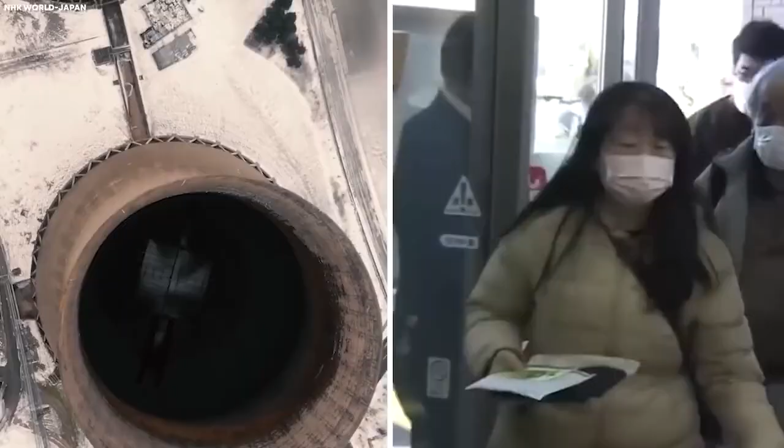Rolling blackouts became common in some regions. Electricity bills rose sharply, putting strain on families and businesses already recovering from the earthquake and tsunami. Fear of future shortages spread across the country. People worried whether Japan could ever achieve energy stability again.

The images from that time were heartbreaking. Families who had lived for generations on ancestral lands had to abandon them overnight. Farmers were forced to slaughter animals they could no longer feed or sell because of radioactive contamination. Children went to school wearing radiation monitors, and parents feared that their kids would never grow up in a safe environment. The Fukushima disaster left a scar that was not only physical, but also emotional and cultural. Confidence in the government's ability to keep people safe was badly damaged.

In the years after Fukushima, Japanese engineers and policymakers faced a problem that seemed almost impossible to solve. Nuclear energy had collapsed as a trusted option. Fossil fuel imports were draining the economy, and renewable energy sources like solar and wind were struggling to provide consistent power at the scale Japan needed. Out of this desperation came an idea so bold that it made the world laugh at Japan. Japan would turn to the one resource it had in abundance, the powerful ocean currents running along its coast.

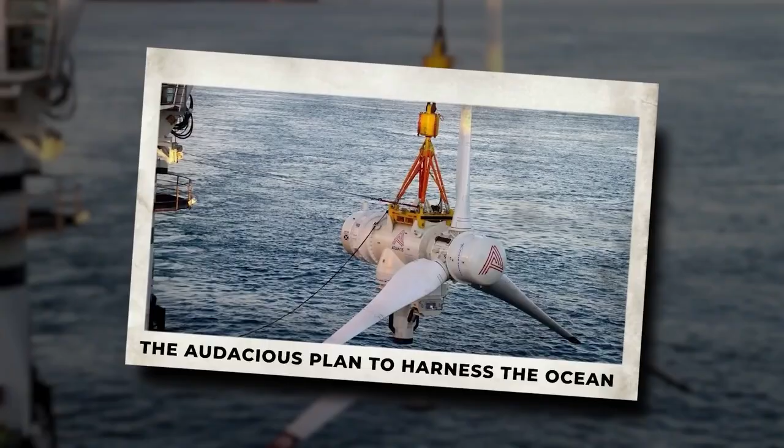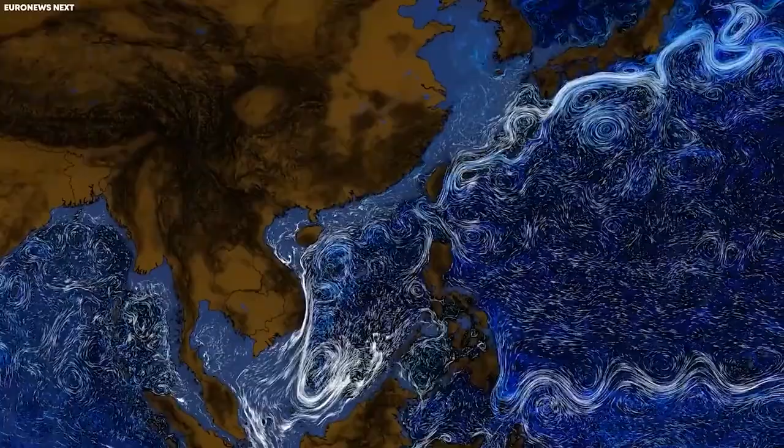The audacious plan to harness the ocean. The Kuroshio Current became the center of this vision. Known as one of the strongest ocean currents in the world, it flows northward past Japan's Pacific coast like a massive underwater river. Unlike wind or sunlight, which fluctuate depending on weather, ocean currents move day and night, season after season, with remarkable consistency. This stability is a dream for energy planners because it means the electricity supply would be steady and predictable rather than intermittent. If Japan could capture even a fraction of the Kuroshio Current, it could secure a new and reliable energy source for decades.

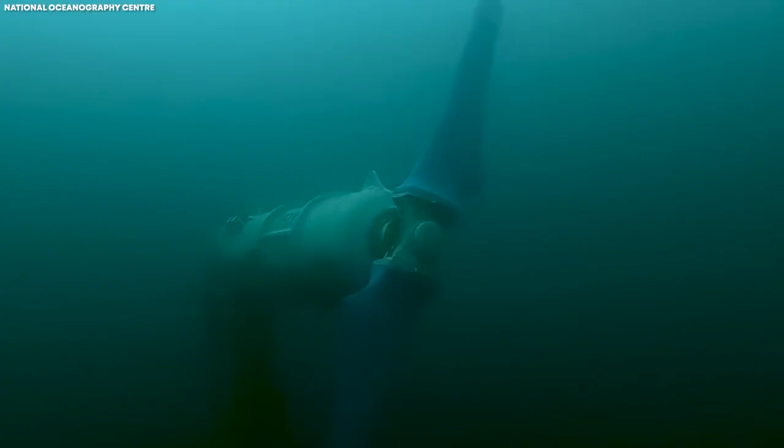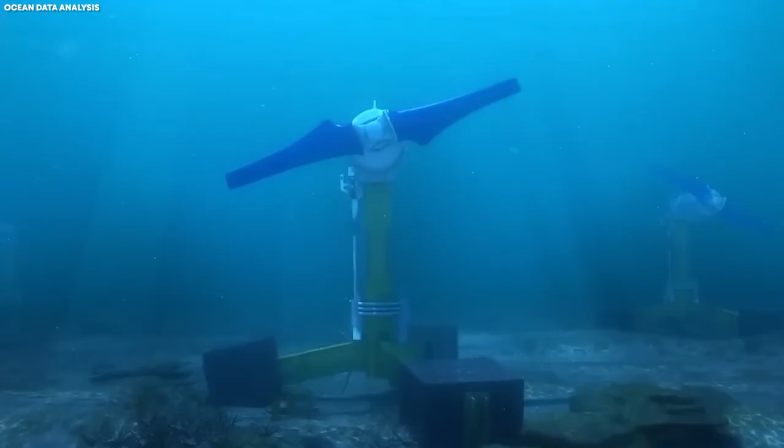The idea was straightforward on paper, but radical in practice. Japan would sink massive turbines into this current and let the force of moving water turn giant blades to generate electricity. Instead of filling land with solar panels or covering hillsides with wind towers, the country would build its power stations under the sea. These turbines would not be seen from the shore and would not take up precious space on land, making the plan politically appealing in a crowded island nation.

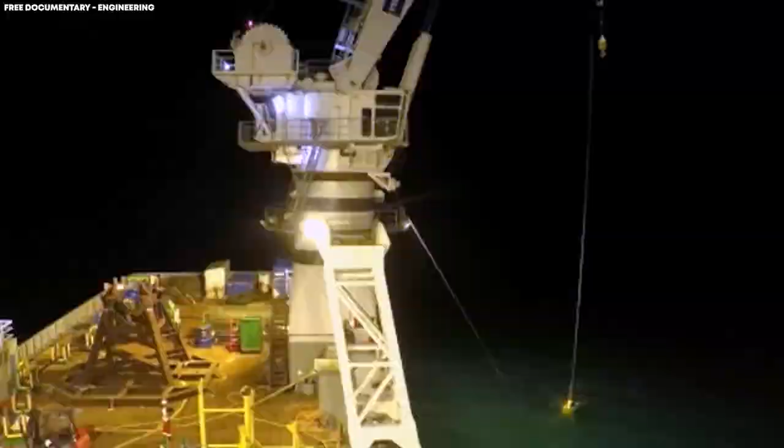Early studies suggested that the Kuroshio current contained staggering potential. Analysts estimated that if even part of the current could be harnessed, it could provide up to 200 gigawatts of electricity. That number was more than Japan's entire national demand, meaning the current alone could theoretically power the whole country and still have energy to spare.

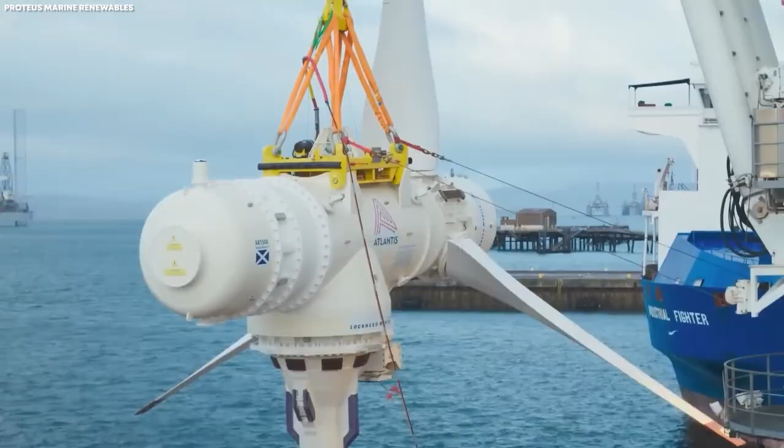For politicians, this vision became more than a technical plan. It was a symbol of recovery after national tragedy. Newspapers framed the concept as a chance for Japan to lead the world in a new kind of renewable power. The ambition was breathtaking, but it also sounded unbelievable to many.

Before the first turbines were ever lowered into the sea, critics were already lining up. Mockery, blackouts, and the 2018 Hokkaido tragedy.

From the start, Japan's plan to sink giant turbines into the ocean was treated as a national joke. Commentators laughed that the country had lost its mind and was wasting money on fantasy projects at sea. Business columnists sneered that Japan was chasing a dream fit for cartoons, while the rest of the world built practical solutions like wind farms and solar grids.

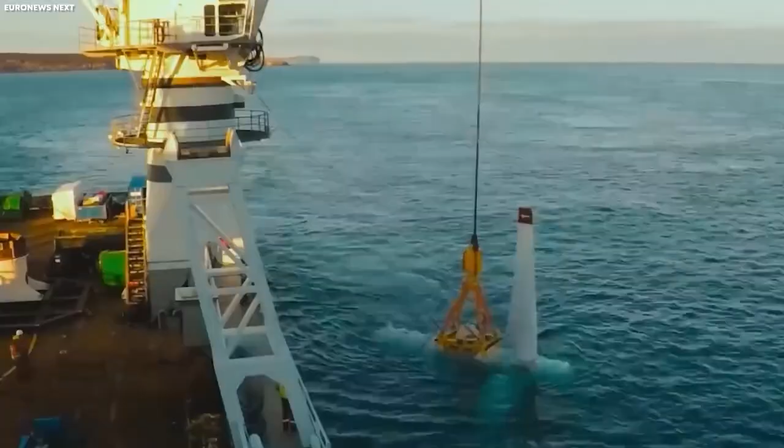International critics were even harsher, declaring, "Japan wants to power itself with invisible machines in the deep ocean, but it cannot even keep the lights on during a storm."

Critics immediately turned to the 2018 blackout. In September that year, before dawn, a powerful earthquake struck Hokkaido. Measuring 6.7 in magnitude, it shook the island hard enough to topple homes, while landslides buried entire communities. But the true disaster came when the Tomato Atsuma thermal power plant, which supplied almost half of Hokkaido's electricity, was knocked offline.

In an instant, the entire grid collapsed. All of Hokkaido went dark. More than 5 million residents lost power. Trains stopped on their tracks. Traffic lights went out, throwing intersections into chaos and creating massive gridlocks. Families were left in freezing apartments with no light, no heat, and no way to keep food from spoiling.

Hospitals switched to emergency generators, but some ran dangerously low on fuel. Doctors were forced to work by flashlight, fighting to keep patients alive as machines began shutting down around them.

The blackout took lives too. One of the most heartbreaking cases was a young girl in a hospital who relied on a ventilator to breathe. When the power went out, her life support system failed. The backup generator could not keep her machine running long enough. She died in the dark, and her parents could only watch helplessly as doctors tried to keep her alive with equipment that no longer worked.

On the roads, another tragedy struck. A middle-aged truck driver was caught in one of the massive traffic jams created when traffic lights failed across the island. Cars stretched for miles, locked in lines with no escape. The driver was forced to sit for hours in the sweltering cab, with no way to move and no immediate access to medical help. He suffered a fatal heart attack while trapped in the jam, and by the time rescuers finally reached him, it was too late.

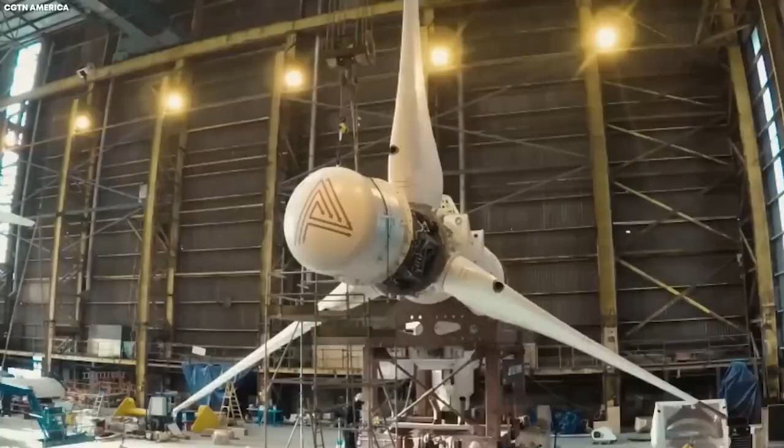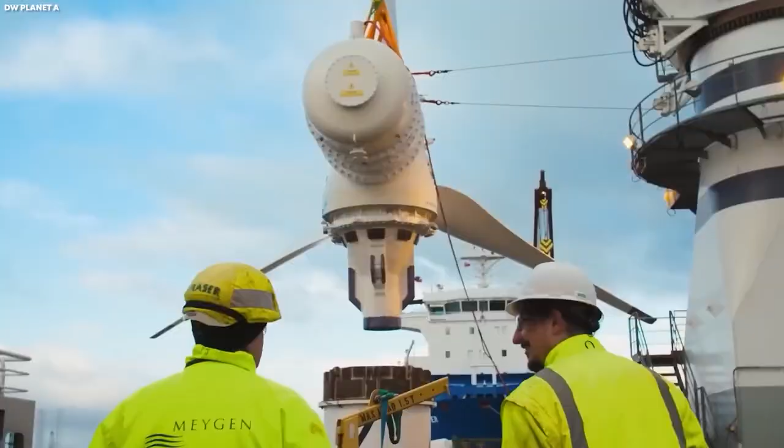The tidal turbine project became an easy target in the aftermath. Politicians and commentators pointed straight to Hokkaido. They said Japan had no business pouring billions into sinking machines in the ocean when people were dying on highways and in hospitals because the national grid was so fragile. Online forums were even crueler, with commenters saying the only thing Japan's ocean project was powering was the laughter of the world. Yet even with the sting of that humiliation, Japan's engineers refused to back down.

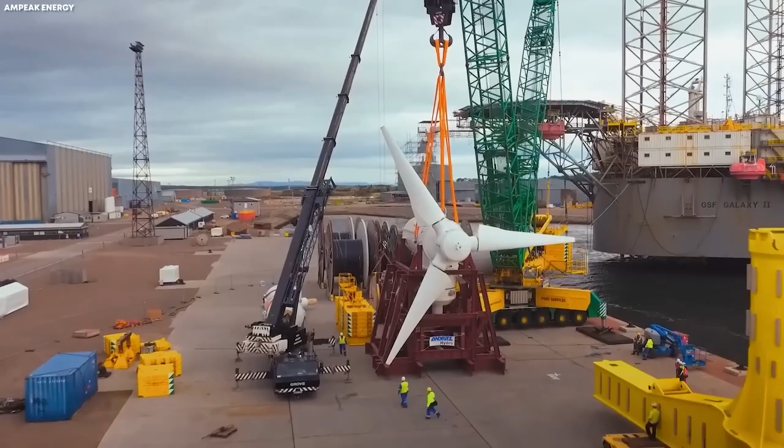Away from the headlines, they began preparing their first real step into the ocean.

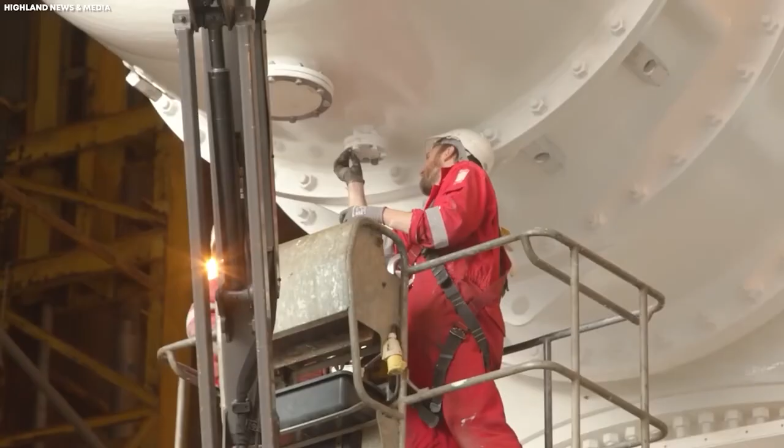First steps: sinking the pilot turbine. In 2021, Japan finally moved from theory to practice. The country launched its first real experiment with ocean current power by installing a prototype turbine known as the AR-500. This was a pilot device, built to test the technology on a limited scale before attempting larger deployments.

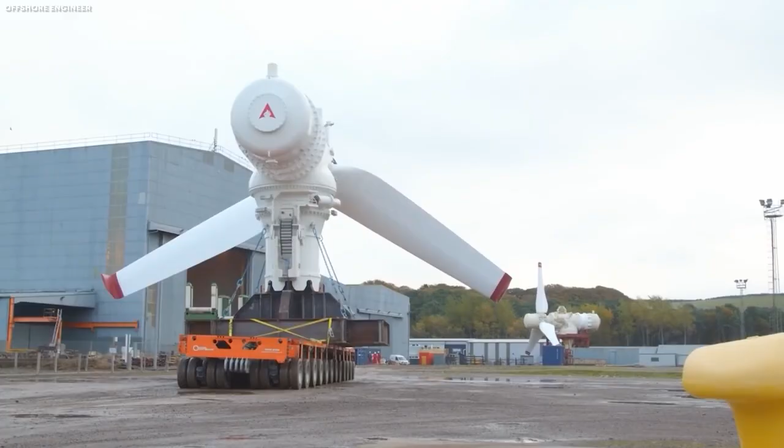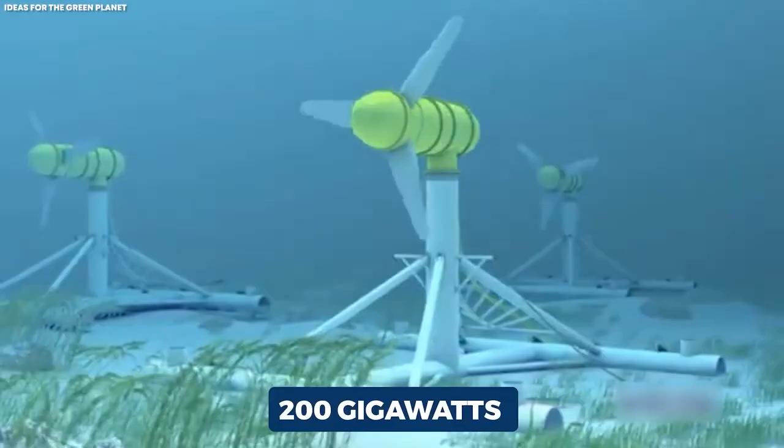The AR-500 could generate 500 kilowatts of electricity, enough to supply a few hundred homes, but far below what Japan needed nationwide. It was never meant to solve the crisis on its own. Instead, it was a learning tool placed in the Naru Strait to prepare engineers for the much bigger goal: tapping into the Kuroshio current, which held the potential to generate as much as 200 gigawatts of power. While modest in size, the AR-500 represented a critical first step toward that ambition.

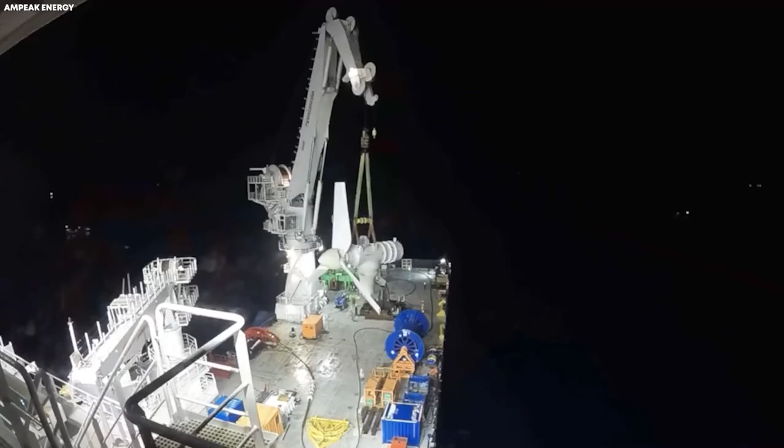The team began by placing the turbine in the Naru Strait, a narrow body of water in Japan where ocean currents are strong and steady. Choosing this location was strategic. The strait offered powerful enough water flow to turn the blades consistently, but was also close to shore, which made it easier to connect the device to monitoring equipment and carry out repairs.

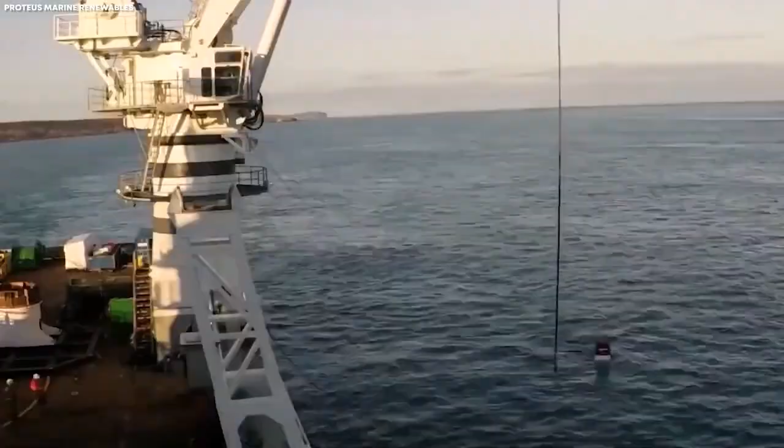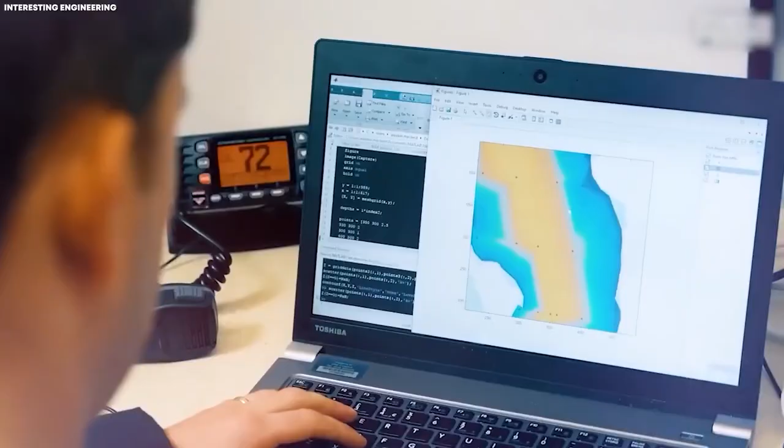The AR-500 worked on the same principle as a wind turbine, but instead of blades turning in the air, the blades were turned by the force of moving seawater. Ocean water is about 800 times denser than air, so even a relatively slow current carries a tremendous amount of energy. This density allows water-driven turbines to generate more power with smaller blades compared to wind turbines. However, it also means the stress on the equipment is far greater, which is why the pilot was essential to test durability. One of the biggest engineering challenges was anchoring the device.

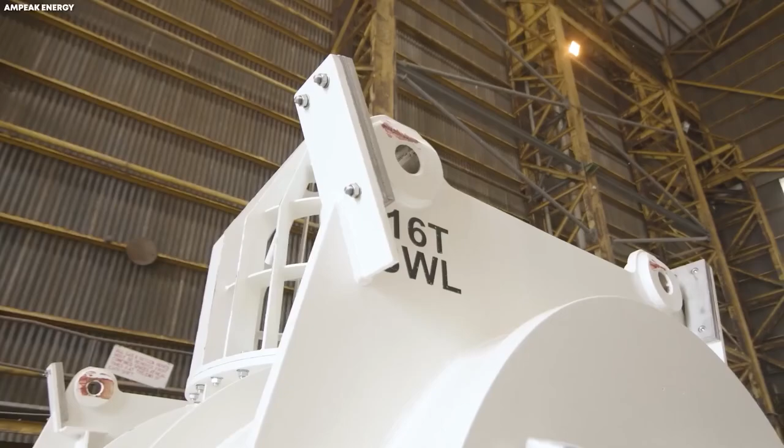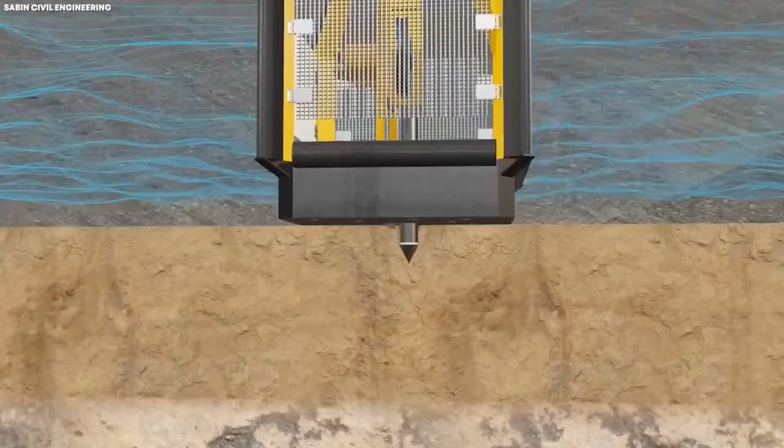On land, a wind turbine can be bolted to a solid foundation. In the ocean, the seabed is uneven, shifting, and constantly subjected to enormous forces from tides and storms. Engineers had to design a mooring system strong enough to hold a 300-ton structure steady under extreme pressure. They adapted techniques from offshore oil rigs, which have decades of experience in deep-water anchoring. Thick steel cables were driven into the seabed, while floating platforms kept the turbine suspended in the strongest part of the current.

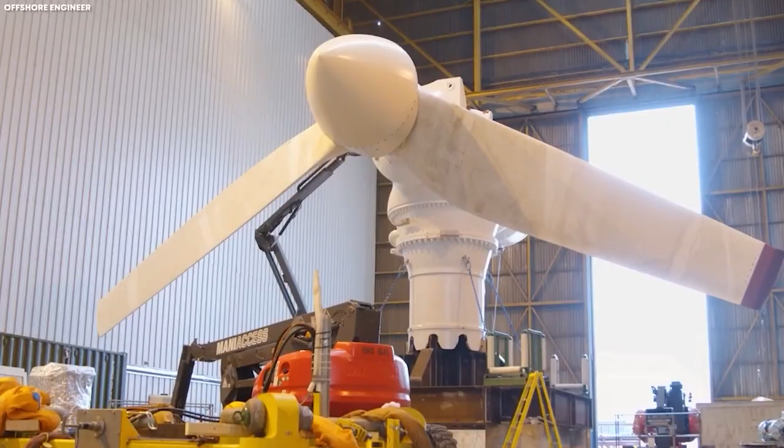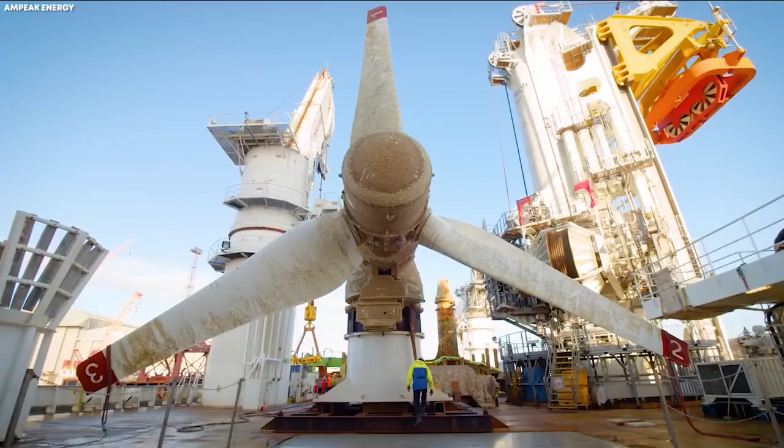Another challenge was corrosion. Saltwater is one of the most destructive environments for machinery. Metals rust quickly, and moving parts can seize up if not protected. To fight this, the turbine blades and rotors were coated with special anti-corrosion layers and made from composite materials designed to resist both rust and the growth of marine organisms. Without these measures, the blades could quickly become encrusted with barnacles and algae, a problem known as biofouling, which reduces efficiency and can damage equipment.

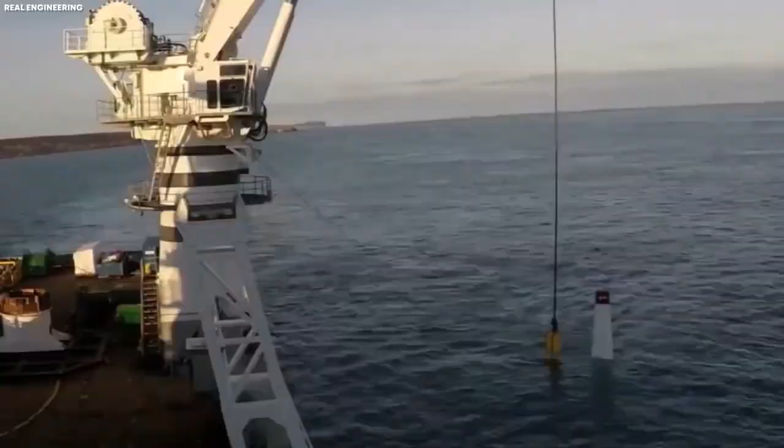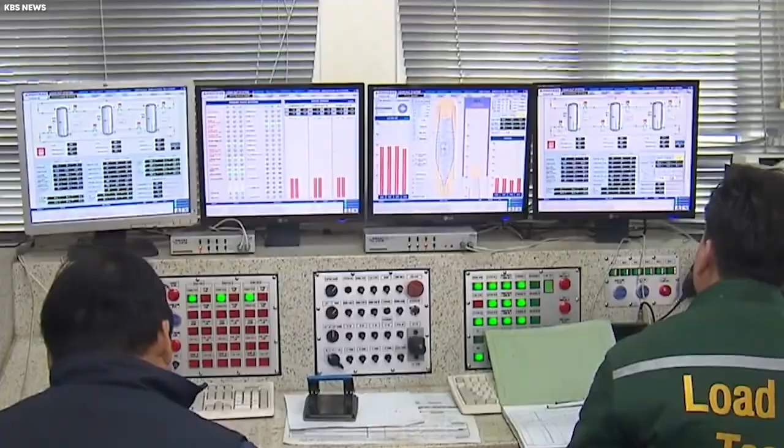The AR-500 was also connected to a network of sensors. These sensors measured water flow, blade rotation speed, pressure on the anchors, and vibration levels inside the machinery. All of this data was sent to monitoring stations on shore. This constant feedback was critical because the engineers wanted to know not only whether the turbine produced power, but also how it survived weeks and months of non-stop operation in a harsh environment.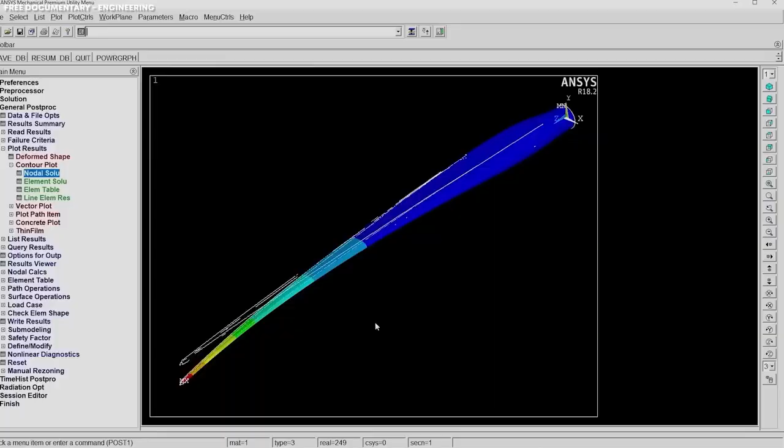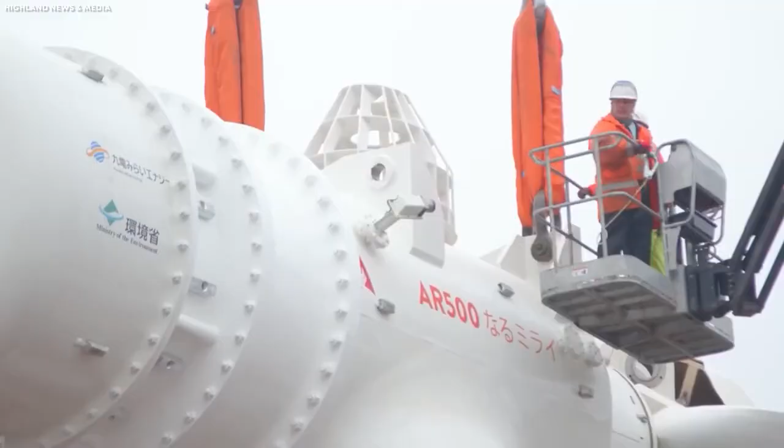Once the turbine was installed, it began generating power successfully. The electricity output was limited, enough for only a few hundred homes, but that was never the point. The pilot was designed to answer key questions. Could the structure survive heavy storms? Could the blades turn continuously without breaking? Could maintenance crews access the machine safely? And most importantly, could the system provide stable, predictable electricity without major interruptions?

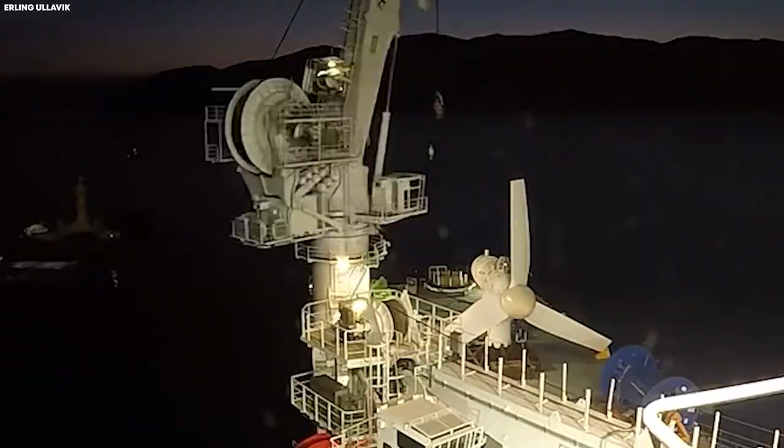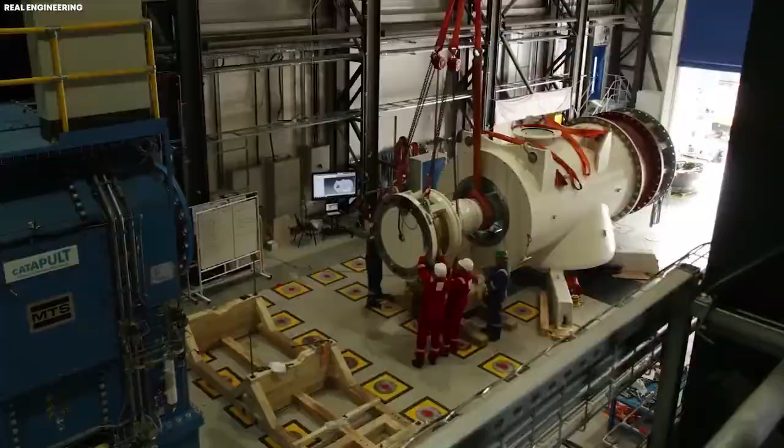The results were promising. The AR-500 demonstrated that ocean turbines could generate reliable power under real-world conditions. It also gave engineers valuable lessons. They learned how the anchors shifted during storms, how the cables wore down over time, and how often the turbine would need maintenance. Each problem revealed by the pilot became an opportunity to strengthen the design for the larger turbines that would follow. But moving from a small pilot to full-scale turbines was a different challenge altogether. The moment Japan tried to scale up, the problems multiplied, and the wave of mockery came crashing back.

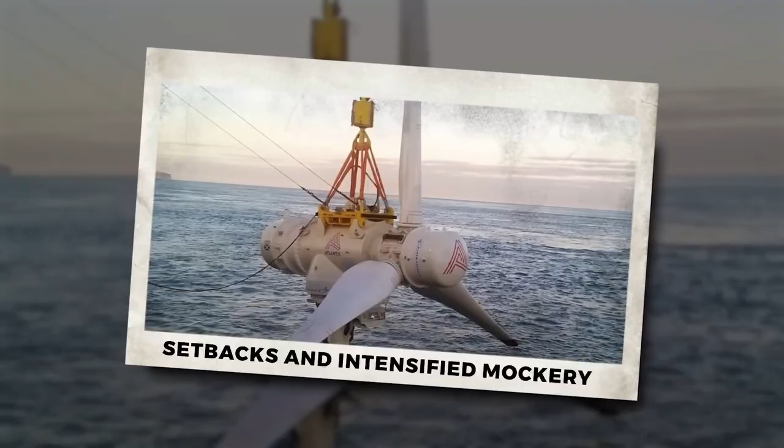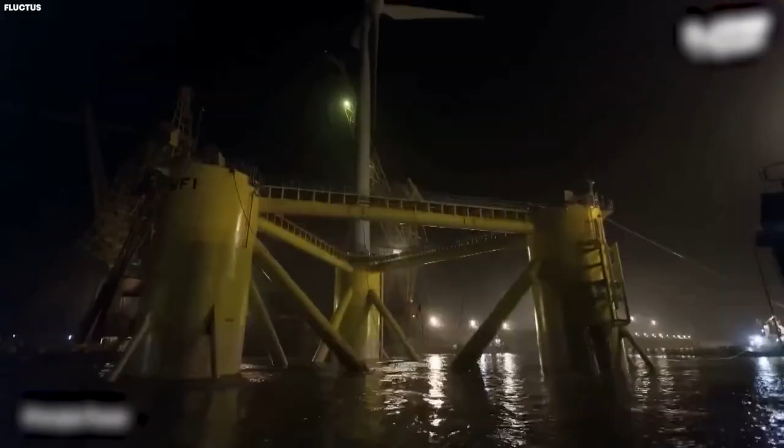Setbacks and intensified mockery. The first issue was cost overruns. Installing turbines in the open ocean was far more expensive than engineers had projected. Every stage, from transporting heavy equipment to hiring specialized ships and divers, cost millions. Building a turbine that could survive constant exposure to seawater required advanced materials and coatings that drove prices even higher.

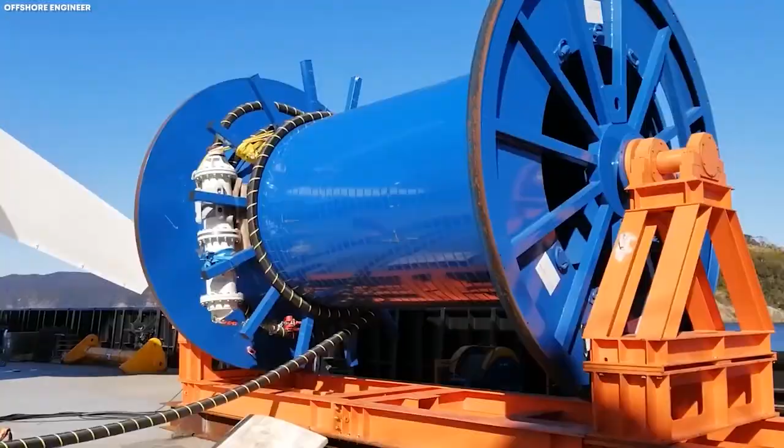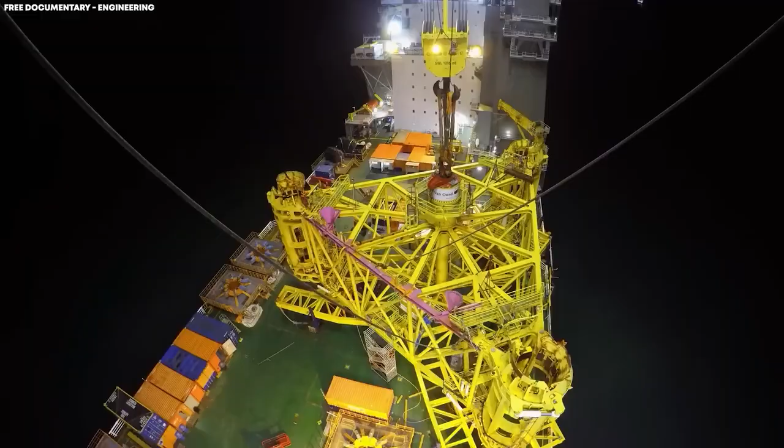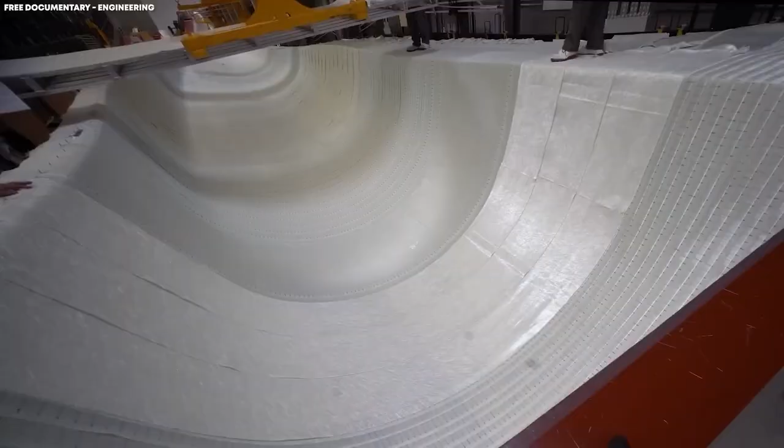Then came wear and tear. The pilot had already shown how corrosive and punishing the sea could be, but larger turbines suffered in ways that calculations had not fully predicted. The anchors shifted more than expected during storms, which meant expensive repairs. Cables that carried power back to shore began showing damage earlier than planned. Even the turbine blades, designed with anti-corrosion layers, developed cracks from the enormous pressure of fast-moving currents.

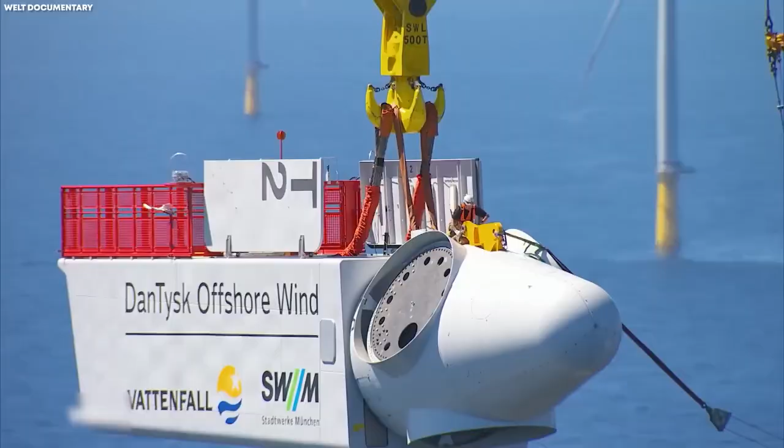The most visible failures came when early larger prototypes were placed in rougher waters. Some turbines experienced mechanical faults within months. Bearings wore out, gearboxes jammed. In one case, a machine broke free of its moorings and had to be salvaged at enormous cost. Crews had to mount rescue operations with cranes and barges, spending millions just to haul damaged equipment back to shore.

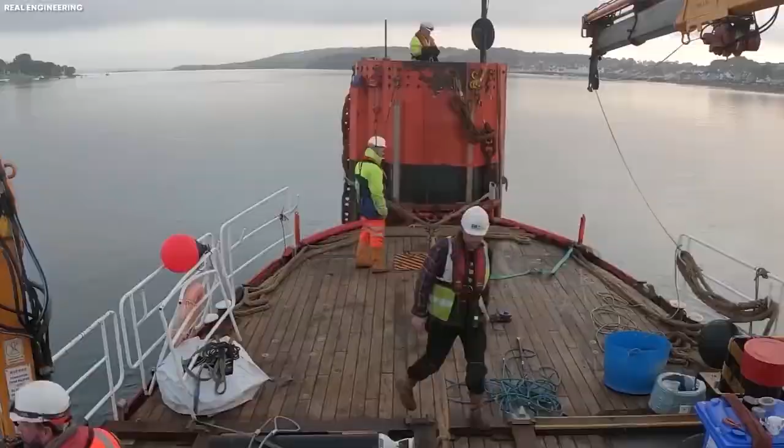Each of these setbacks was amplified by critics. The press was merciless. Headlines mocked the project as a sinkhole for taxpayer money. Commentators compared the ocean turbines to submarines that do nothing but eat cash. Business analysts asked why Japan was sinking structures when offshore wind is cheaper and proven. The laughter that had followed the plan years earlier now returned even louder, armed with fresh evidence of failure.

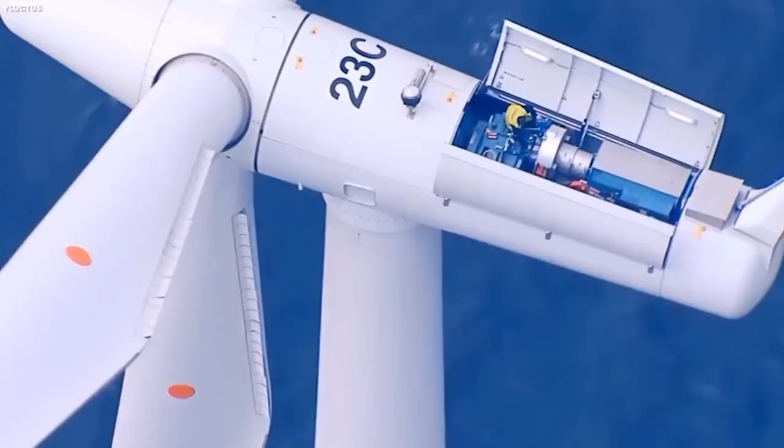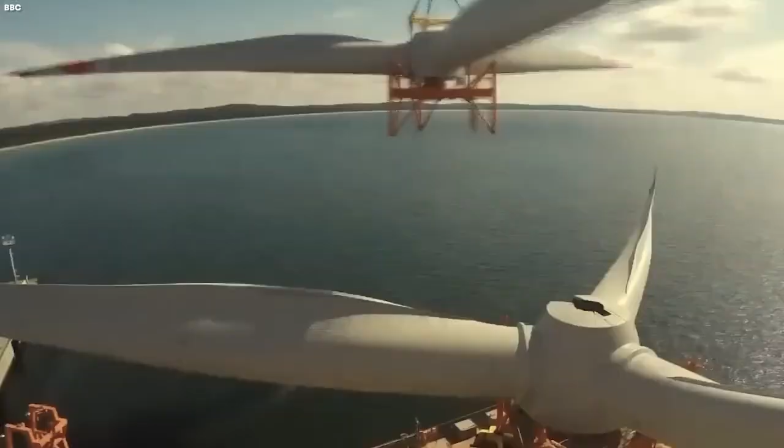Other countries' progress only made the humiliation sharper. Europe, especially the United Kingdom and Denmark, was seeing enormous growth in offshore wind farms. The technology was proven, the costs were falling, and turbines were delivering electricity reliably to millions of homes. Against this backdrop, Japan's experiment looked increasingly foolish. Instead of joining the global success story, it appeared to be stuck in its own expensive detour.

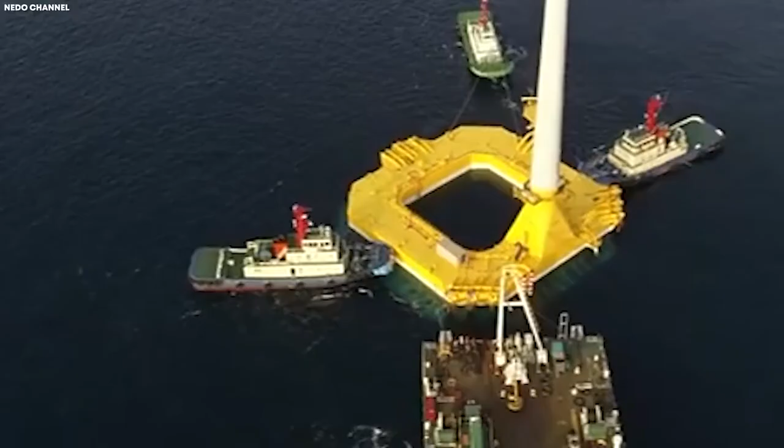At home, opposition grew louder. Japan's budget was already stretched by the cost of rebuilding from earthquakes, tsunamis, and aging infrastructure. Politicians and public figures began to argue that the country could not afford to waste money on projects they called dead on arrival. They demanded that funds be diverted to repairing the fragile national grid, rebuilding hospitals, and fixing crumbling roads. For many citizens, the memory of the 2018 blackout was still raw. They asked why the government was experimenting with the ocean while people had died because of failures on land.

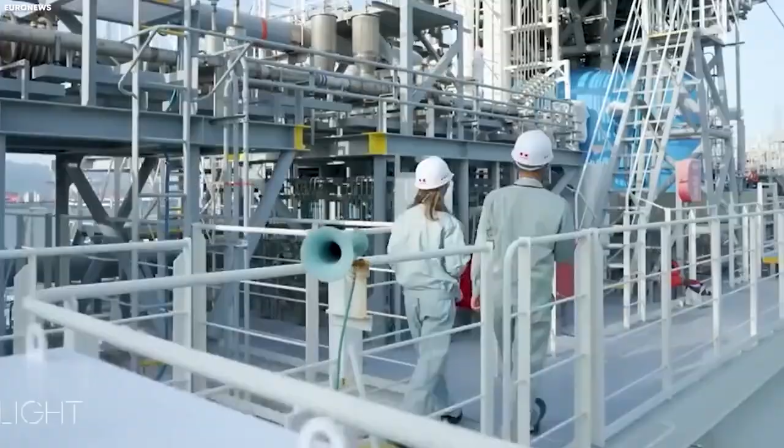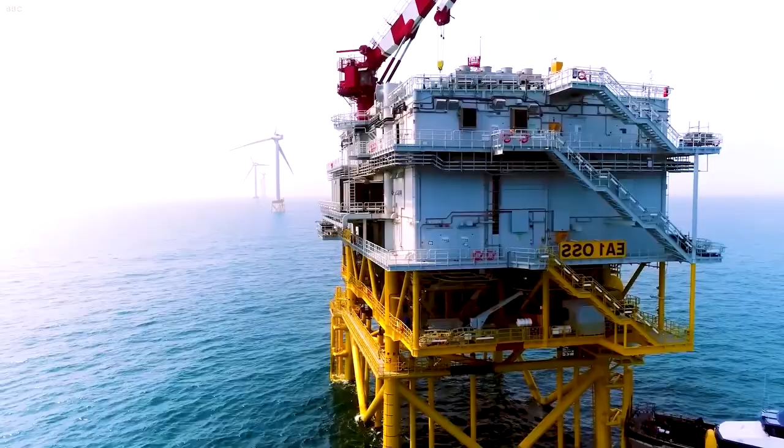Inside the engineering teams, the atmosphere was suffocating. The scientists and technicians knew the problems were not impossible to solve, but they needed time, data, and funding. Instead, they faced daily headlines questioning their competence and politicians hinting at shutting down the program. Each failure was not seen as part of the learning process, but as proof the whole concept was doomed. For a while, it seemed the critics might be right. The setbacks piled up, the ridicule intensified, and the dream of ocean power looked like it might collapse under its own weight. And yet, against all odds, a breakthrough came that changed everything.

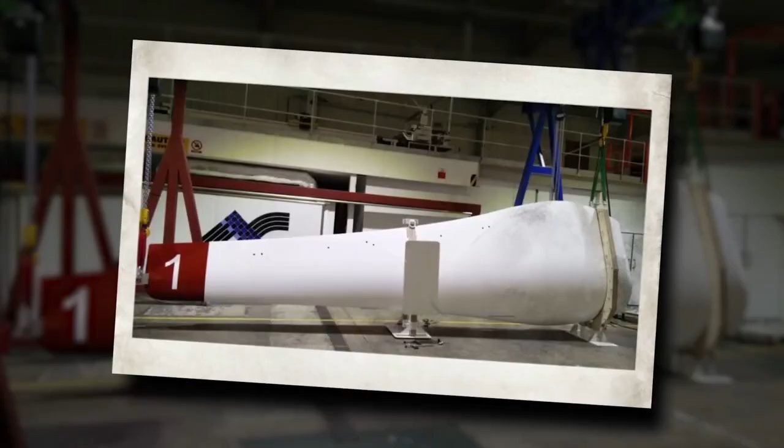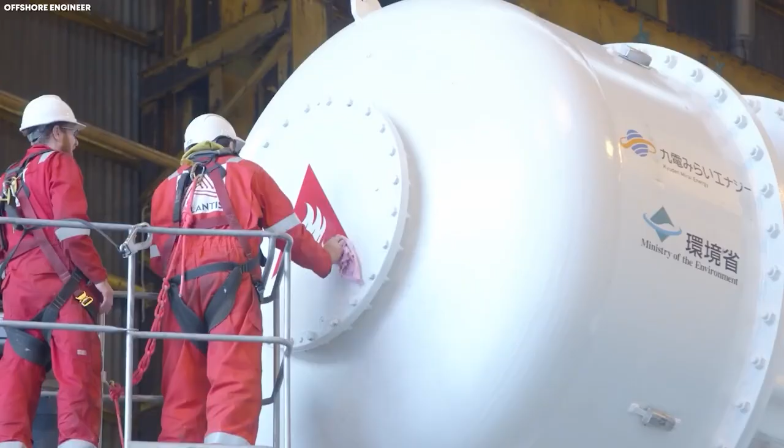The first breakthrough. By early 2025, after years of frustration, Japan finally made the leap from small-scale experiments to something that truly mattered. The nation installed its first megawatt-scale tidal turbine, known as the AR-1100, in the Naru Strait. Unlike the earlier pilot, which had been little more than a proof of concept, this machine was designed to show the world that tidal energy could work at a national level.

The AR-1100 earned its name because of its capacity, 1.1 megawatts. A single megawatt is enough to supply hundreds of homes with electricity, and this turbine promised steady, uninterrupted output. Unlike solar panels, which stop generating at night, or wind farms, which can go idle on calm days, tidal energy is driven by ocean currents that never stop moving. That stability meant the AR-1100 could deliver electricity to the grid every hour of every day, providing a kind of consistency Japan had been desperate for since Fukushima.

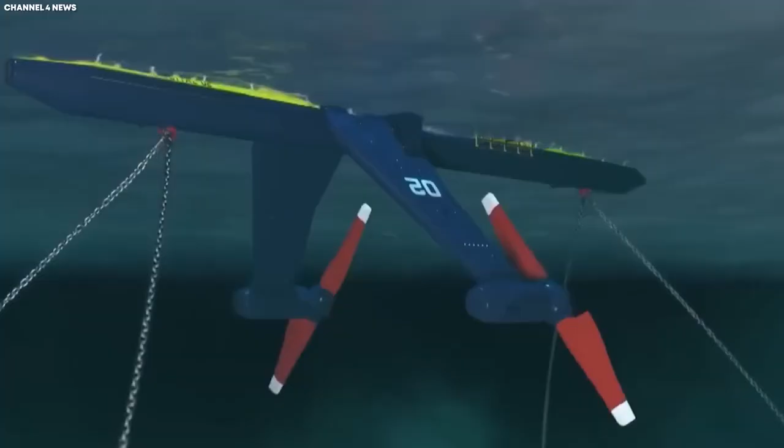The engineering behind the AR-1100 was remarkable. The turbine's rotors stretched wide like an underwater windmill, designed to capture the dense flow of seawater. Because water is so much heavier than air, the blades could rotate slowly and still generate large amounts of power. This reduced wear compared to high-speed turbines and made the system more durable. The entire structure weighed hundreds of tons, and its installation required specialized ships, cranes, and divers working together with precision.

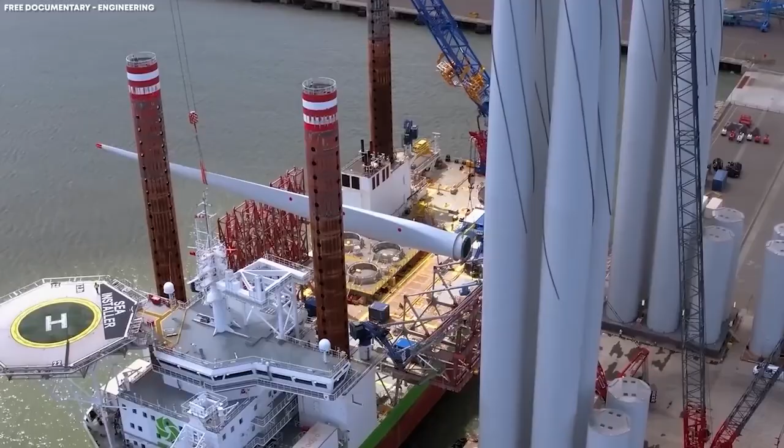Anchoring it was a challenge in itself. The currents in the Naru Strait are powerful, and storms often sweep across the Pacific with devastating force. Engineers used mooring lines similar to those developed for offshore oil rigs, embedding massive anchors into the seabed to keep the structure steady.

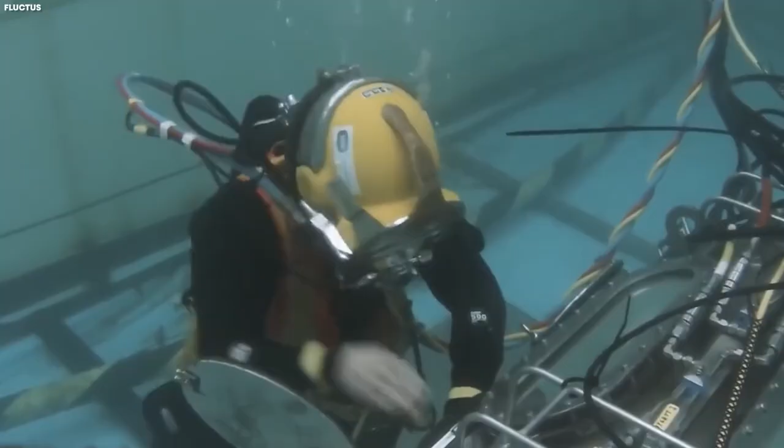Once the turbine was in place, the next test was connecting it to the grid. A heavy-duty submarine power cable was laid across the seafloor, linking the turbine directly to Japan's national electricity system. This connection was historic. For the first time, power generated from an underwater current flowed into homes, businesses, and hospitals across Japan. What had once been dismissed as science fiction became visible in real numbers on the grid.

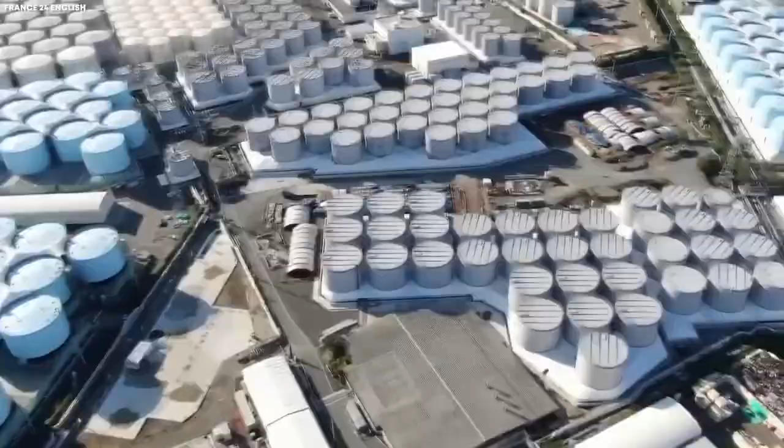When the system went live in February 2025, engineers on shore watched as the meters ticked upward. The AR-1100 was generating at full capacity, delivering steady electricity day and night. For the teams who had endured years of ridicule, it felt like vindication.

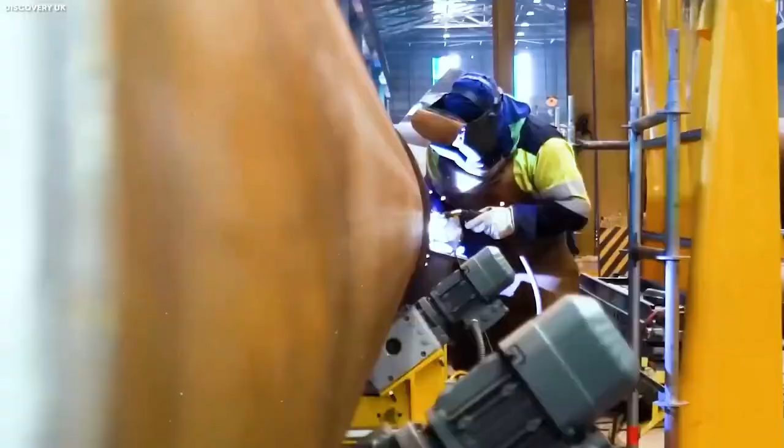But the true revolution came not just from the installation itself, it came from what happened next. From ridicule to revolution, and the future of an ocean-powered Japan.

The turning point came in mid-2025 when Japan's Ministry of Economy, Trade and Industry, METI, formally certified the AR-1100 as a grid-worthy renewable source. The media, which had once ridiculed the project, flipped almost overnight. Headlines that had mocked Japan for chasing fantasies in the sea now ran stories about Japan's ocean revolution. Commentators who had laughed at the idea of giant turbines underwater began comparing the breakthrough to Japan's proudest engineering achievements, like the Shinkansen bullet train.

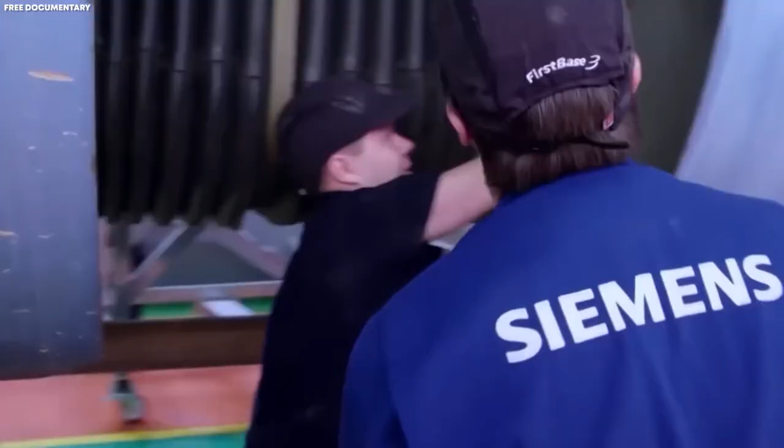Public opinion also shifted. For years, ordinary citizens had grumbled about money being wasted offshore while blackouts struck at home. But with government certification and news coverage celebrating the achievement, many began to feel pride instead of doubt.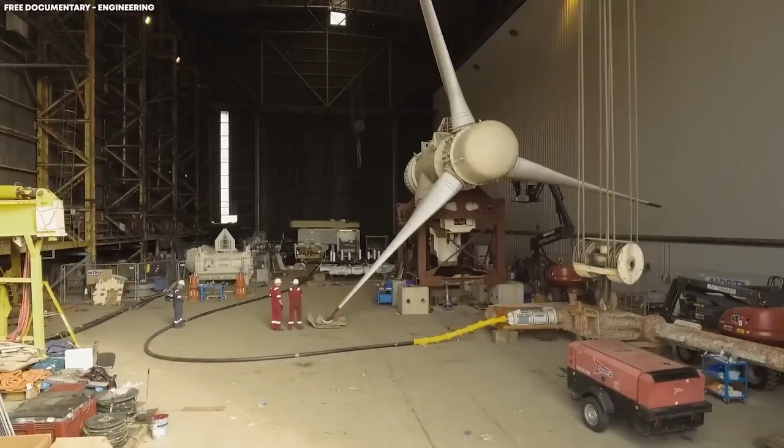Investors noticed the shift as well. Venture capital firms that had avoided the project began pouring money into marine renewable companies. Large corporations signed partnership agreements to accelerate research and production. Shipbuilders saw opportunities to expand into turbine transport. Material science companies invested in new anti-corrosion technologies. The success of one turbine had unlocked a wave of economic activity across multiple industries.

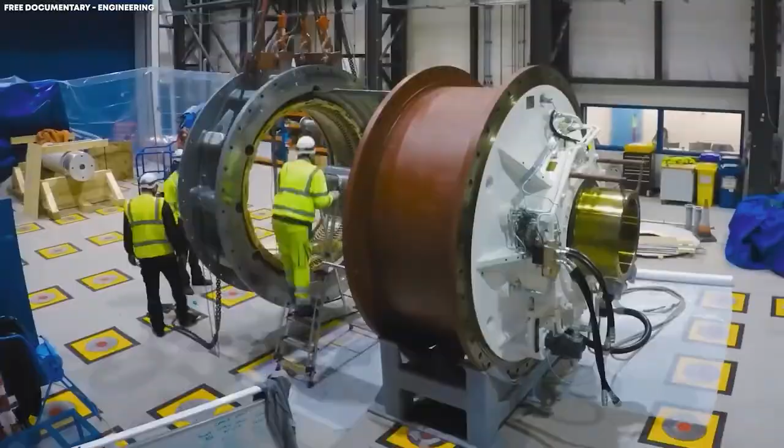The technological benefits spread beyond energy. The engineering solutions developed for the turbines began influencing other fields. Advances in underwater robotics, used to inspect and maintain the turbines, improved Japan's capabilities in marine exploration and deep-sea research. New alloys and coatings designed to resist saltwater corrosion found applications in shipping, defense, and construction.

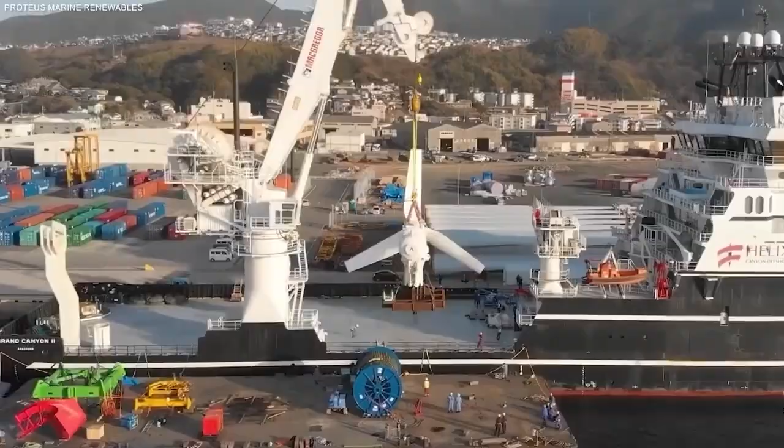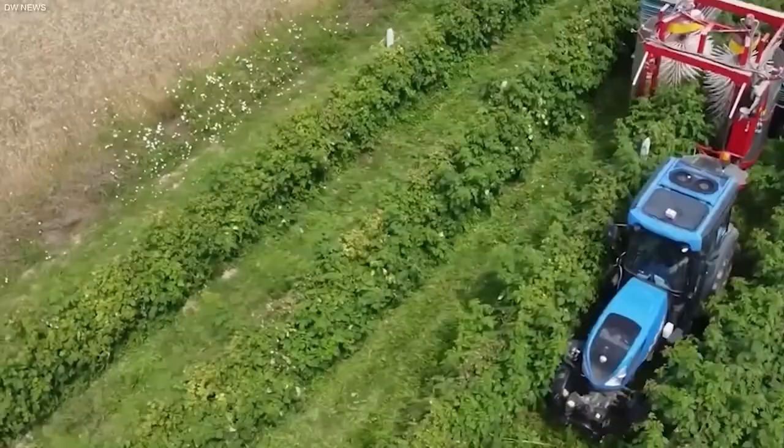The future possibilities are enormous. If Japan expands beyond a single turbine and builds full arrays, entire regions could be powered by ocean currents alone. The implications for agriculture are clear. Reliable, cheap electricity can drive large-scale desalination plants, giving farmers a new source of fresh water and increasing food security. In healthcare, stable power would protect hospitals, ensuring life support systems stay running, even during crises.

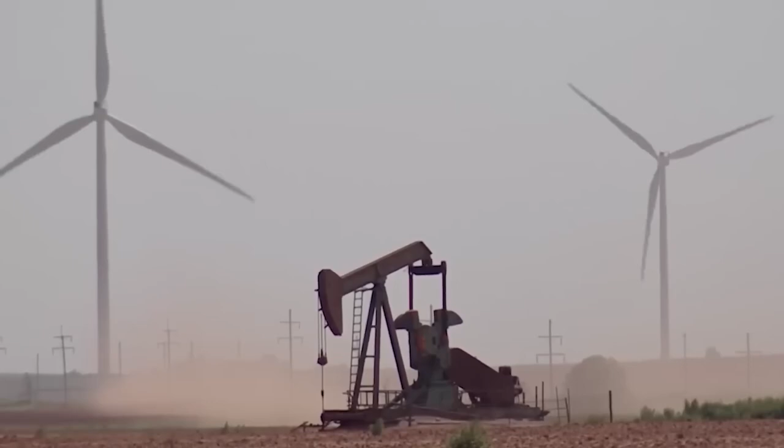For climate policy, the breakthrough could be decisive. Japan has long been criticized for its heavy dependence on imported liquefied natural gas and coal. With tidal energy scaled up, the country could slash those imports, cut carbon emissions, and move closer to carbon neutrality. That would not only protect the environment, but also shield the economy from fluctuations in global fuel prices.

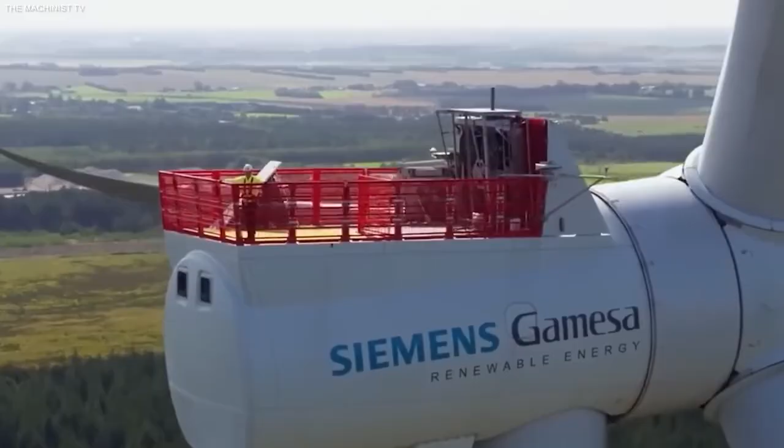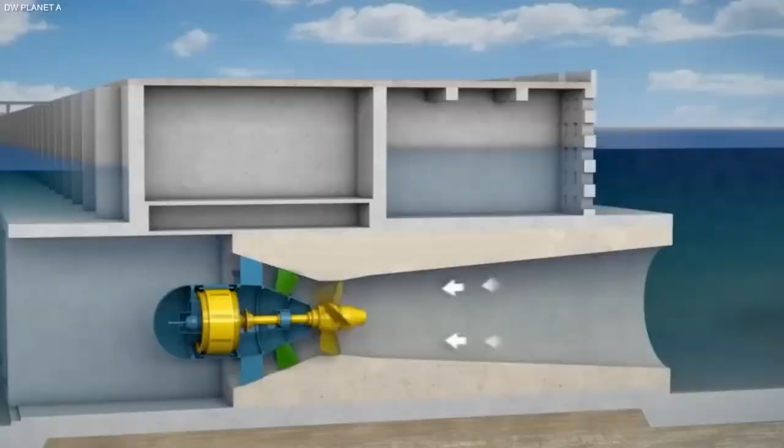Economically, Japan could become the Denmark of tidal energy, exporting not just turbines, but also the expertise to install and maintain them. This would strengthen its global standing and provide leverage in international negotiations, particularly with developing nations eager to adopt clean power. Countries like Chile, with strong coastal currents, or island nations vulnerable to climate change, could adopt Japanese technology. Each installation abroad would reinforce Japan's role as a global leader.

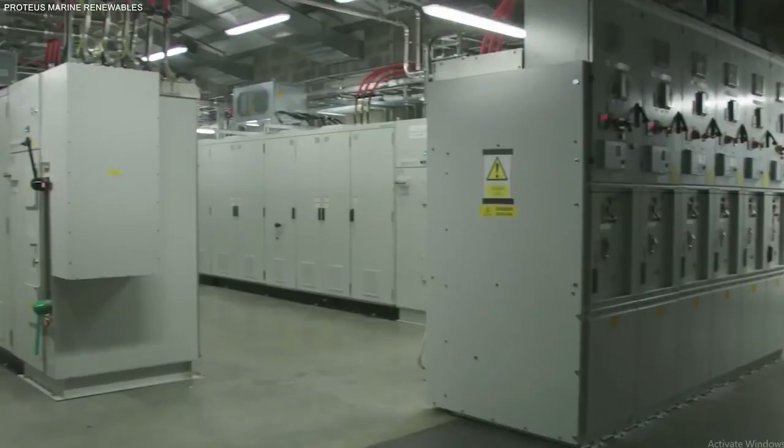Most importantly, scaling tidal energy could give Japan true resilience. Future earthquakes or typhoons would no longer paralyze the grid the way they once did. A diversified energy system, with currents providing a constant baseload, would mean blackouts are less likely to spiral into national crises. The tragedies of Fukushima and Hokkaido would not be forgotten, but they would not be repeated in the same way.

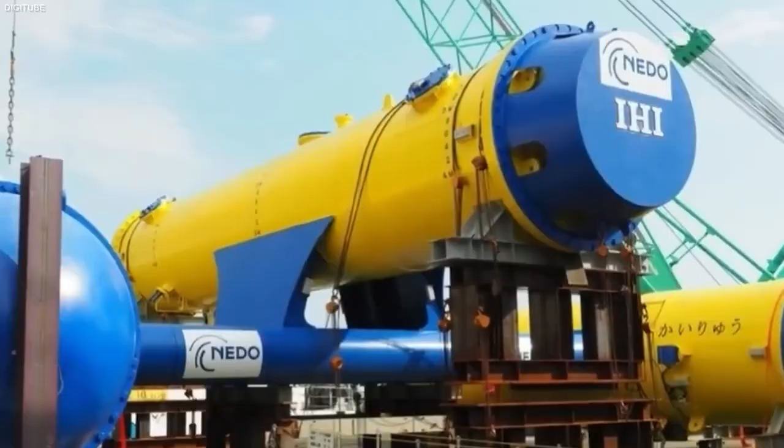Now that Japan has proven turbines can survive, operate, and feed the grid, the path is clear. The next frontier is moving from controlled straits into the Kuroshio itself, where the true scale of this revolution will be unleashed. And once Japan masters the Kuroshio, it will not stop at its own shores.

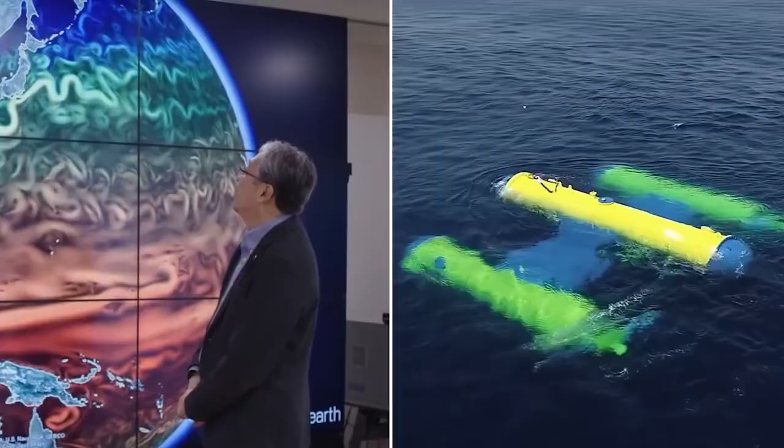The same technology could be exported worldwide, bringing clean and constant energy to nations with powerful currents of their own, from Southeast Asia to South America. What was once laughed at as a doomed fantasy has become Japan's unstoppable path forward, proof that persistence, tragedy, and vision can rewrite history.